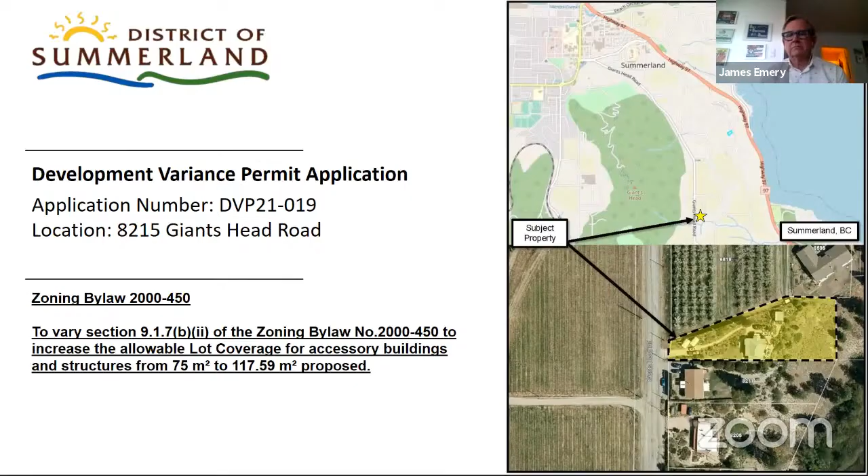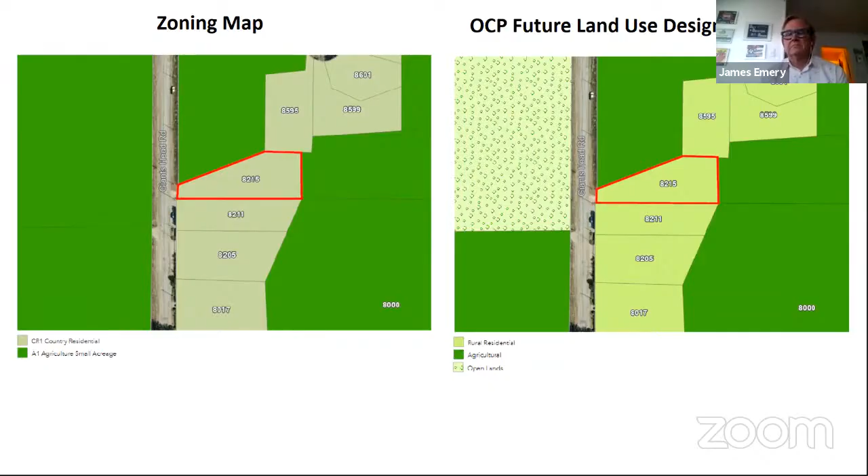In the OCP, the future land use designation of the subject property is rural residential, and it is zoned as CR1 country residential. These land uses are for the most part consistent with neighboring properties. It should be noted that the property is located within the agricultural land reserve.

A letter of correspondence was also received from the Ministry of Agriculture, Food and Fisheries. Their staff noted that if the proposed studio and sauna would be for personal use of the owners, not for agricultural purposes, their interests are unaffected. They also recommended that the applicants maintain a vegetative buffer to mitigate against potential disturbances from the neighboring farm.

As the subject property is not connected to municipal sanitary sewer, a referral was sent to Interior Health. A letter of correspondence was received from Interior Health. Interior Health staff noted that they do not support the issuance of the variance due to the following land constraints: small parcel size, large portion of the property is greater than 30% slope, and the limited area of undisturbed soil available for sewage systems. District staff do acknowledge these concerns.

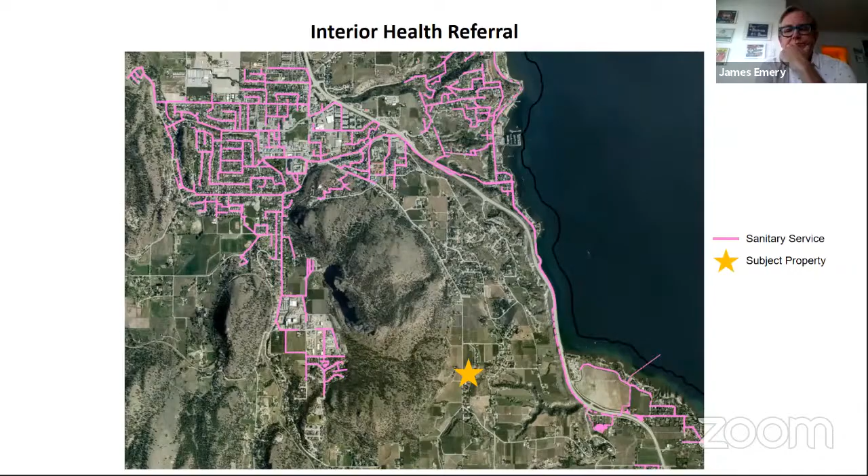However, a septic system approval by a registered on-site wastewater practitioner will be required prior to any building permit that is issued. If no such system can be approved, no development will occur.

Within the CR1 country residential zone, the total allowable lot coverage is calculated at 20% of net lot area. Net lot area means the total area of the lot, excluding any area that exceeds 30% in slope or has been protected as an environmentally sensitive area by a Section 219 covenant or a development permit.

As a result, a large portion of the property is over 30% slope, 836 square meters to be exact, and must be excluded from the lot coverage calculations, which is quite a disadvantage to the property.

The total allowable lot coverage within the CR1 zone for this particular property is 20% of the net lot area, which works out to 260.5 square meters.

The total proposed lot coverage for all buildings and structures on the property is 227 square meters, which meets the bylaw standard for total lot coverage. The proposed development is therefore compliant with the general lot coverage limit.

However, accessory buildings are further restricted to a maximum of 25% of the allowable lot coverage of the site, or 75 square meters, whichever is greater.

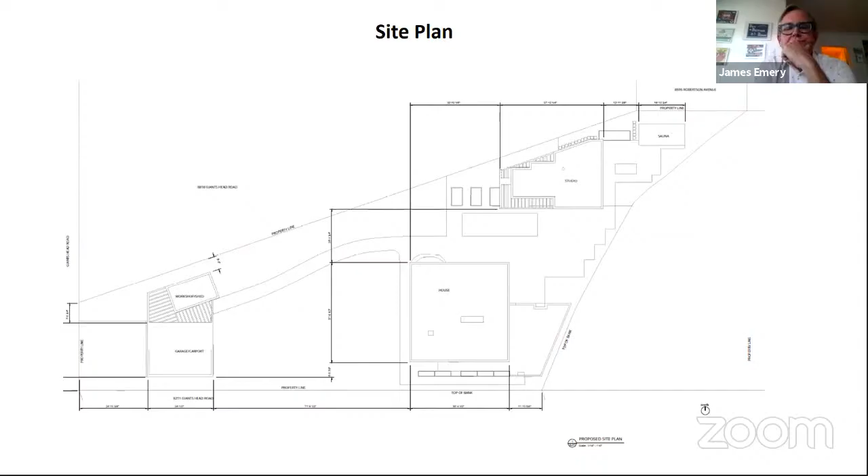In this case, the total proposed coverage for accessory buildings on the site is 117.59 square meters, which exceeds the bylaw allowance of 75 square meters by a total of 42.59 square meters, representing an increase to accessory building lot coverage of an additional 56.7%.

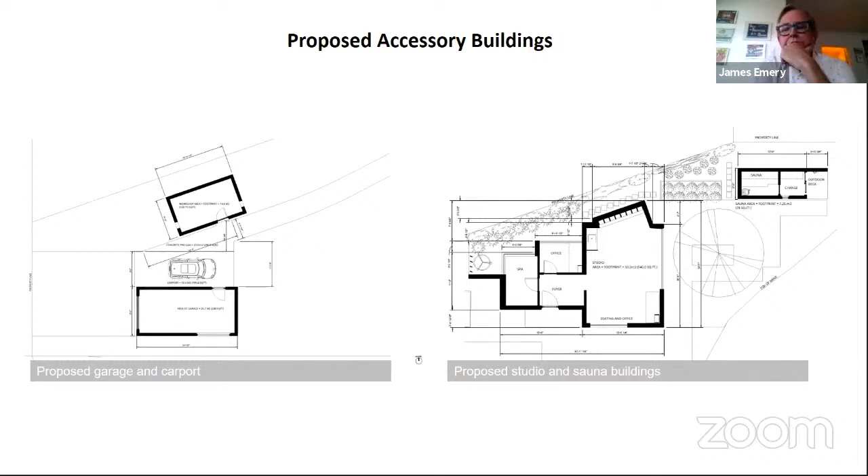Generally, the purpose of restricting lot coverage is to establish building massing and limit impermeable surfaces on a lot to accommodate stormwater infiltration. The proposed lot layout leaves adequate area on site to allow for this infiltration to occur without concern. Though the proposal is not in compliance with the accessory building lot coverage provision, it does comply with all other zoning regulations.

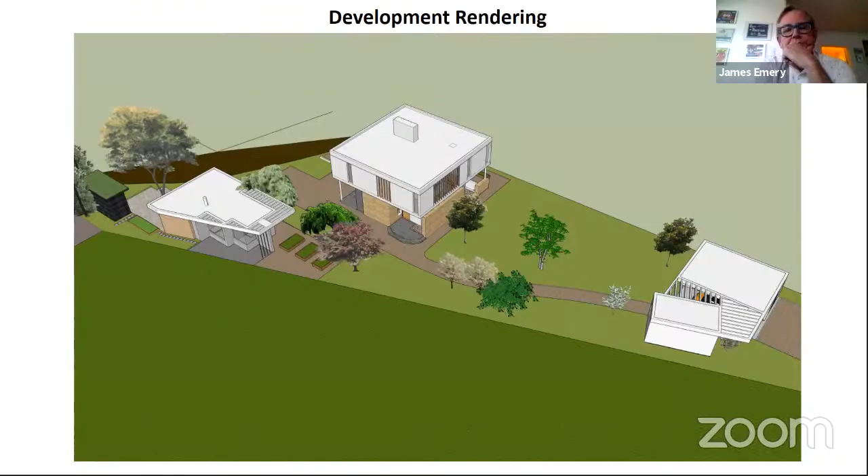Including being under the total allowable lot coverage for all buildings. Further, if the proposed studio and dwelling were attached, then the proposal would fully meet zoning and not require a variance for construction. Based on these factors, and due to the proposal's limited impact on overall neighborhood character and stormwater infiltration, staff are supportive of the variance.

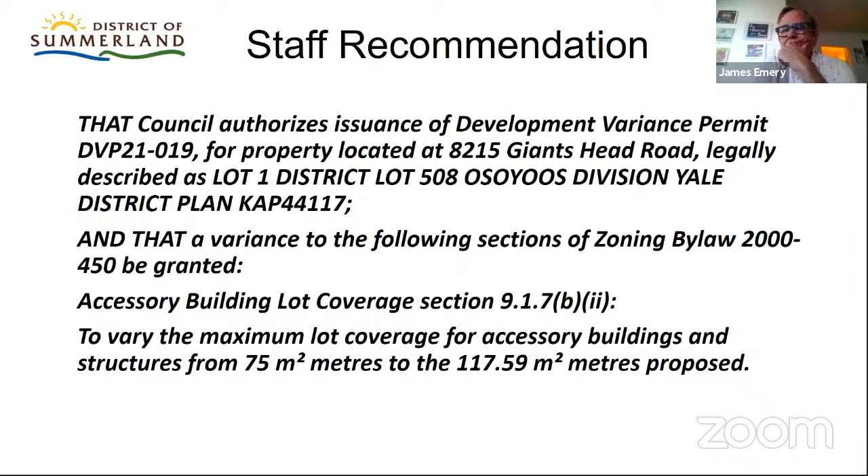I just have one question. Is it proposed that the septic system that's already there will be in the same place? Through the chair, I believe that is the plan. They will be fully redoing their septic system for this development, and I would assume they will choose the same location shown on the site plan. Okay, good, thank you.

Could I have someone bring forward the staff recommendation or something else if you choose? Councillor Holmes: I'll move the staff recommendation that council authorizes issuance of a development variance permit DVP 21-019 for the property located at 8215 Giants Head Road, and that a variance to the following sections of zoning bylaw 2000-450 be granted. Accessory building lot coverage, section 917B2, to vary the maximum lot coverage for accessory buildings and structures from 75 square meters to the 117.59 square meters proposed.

Thank you. Councillor Van Alphen is seconding. Any further discussion? Councillor Barkwell.

I'd just like to note that I like staff's approach on the septic field, not to be bound or hamstrung by very specific arbitrary lot sizes, but to go with what a proper design will work or won't work. There could be lots that have sufficient size that are on solid rock where it wouldn't work, and other smaller lots where it will, such as this, we assume, but there's someone who will do the testing and design the appropriate system, and we can maybe develop some of these spots in Summerland.

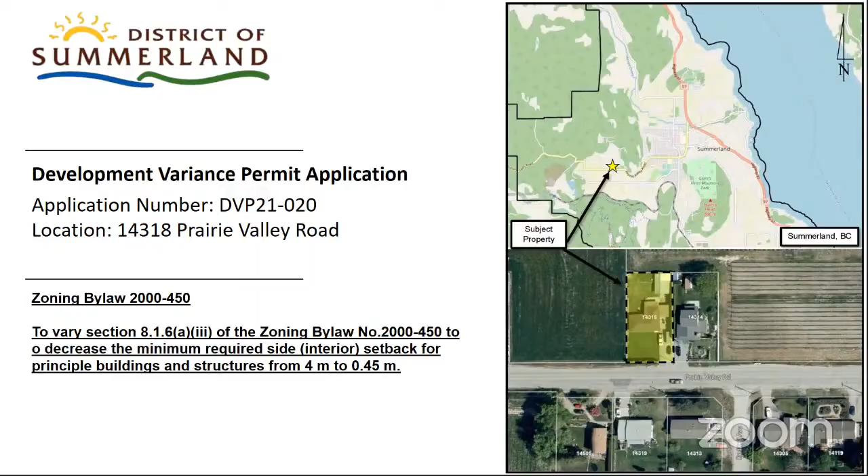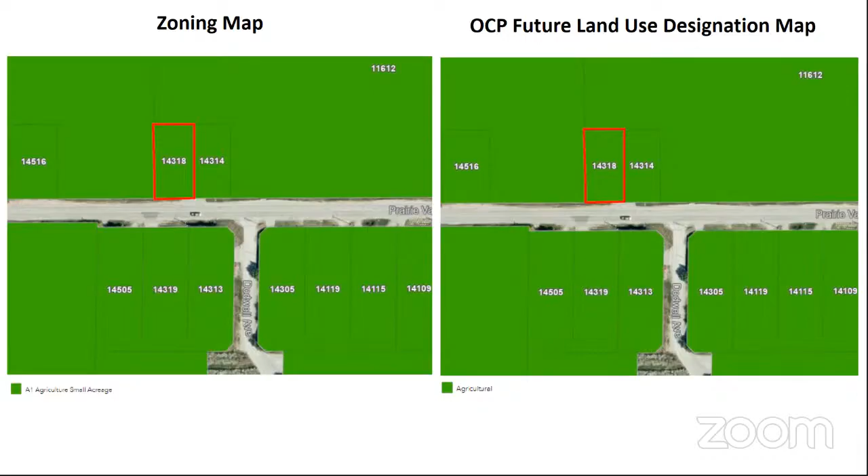In the OCP, the future land use designation of the subject property is agricultural, and it is zoned A1 agricultural small acreage. These land uses are consistent with neighboring properties. It should be noted that the property is located within the agricultural land reserve. No approval is required; however, a referral was submitted to the Agricultural Land Commission and a response was received. They noted that as long as the addition would not expand the residence beyond 500 square meters, the ALC had no objection to the issuance of the variance.

The subject property is a residential lot in Summerland's Prairie Valley. The property owner is proposing to construct a small addition to an existing dwelling. The proposed addition will see an existing covered deck area be enclosed as well as have its roof replaced. The total area of the proposed addition is just 31 square meters.

The existing dwelling does not fully conform to current zoning bylaw yard setback requirements specified for the A1 zone. When an addition is proposed to a non-conforming structure, the non-conformance must first be addressed before the development can proceed and the building permit can be issued.

As such, in order to facilitate the proposed addition, a variance has been requested to section 8.1.6A3 of the zoning bylaw to reduce the required interior side setback from 4 meters to 0.45 meters to bring the dwelling into conformance. While reducing setbacks on residential properties is seldom encouraged because it can disrupt the form and character of a neighborhood, the variance proposed is not anticipated to negatively impact the streetscape. The house has been encroaching into the setback since it was built in 1987, and the proposed small addition will not further encroach into this required setback.

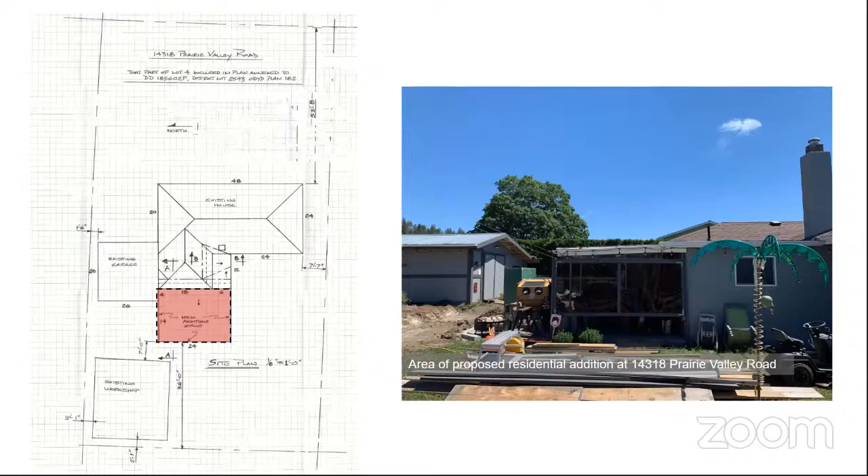When new development occurs to a non-conforming property, it is an opportune time to bring the property into conformance with the zoning bylaw through the approval of a variance. As such, staff recommend approval of the proposed side interior setback variance.

Thank you, Alex. Any questions of staff? I just have one. I didn't see any correspondence related to this item. Can you confirm that, Dallas? There were no written submissions received for this variance. Thank you.

Councillor Van Alphen: Thank you, Madam Mayor. Just a question through the staff, correct me if I'm wrong. So it's agriculturally zoned. Don't we have to confer or engage the ALC on this? Through the chair, we sent a referral to the Agricultural Land Commission, but no, it didn't require any approvals like non-adhering residential or anything like that from them at this time.

So can I ask why then we do so if we're not necessarily required to? Through the chair, often it's just an opportunity to get comment, because we are proposing a variance to our bylaw that could have impacts to their interests. So oftentimes it's more of a better-safe-than-sorry type of thing, and sometimes good recommendations come out of it.

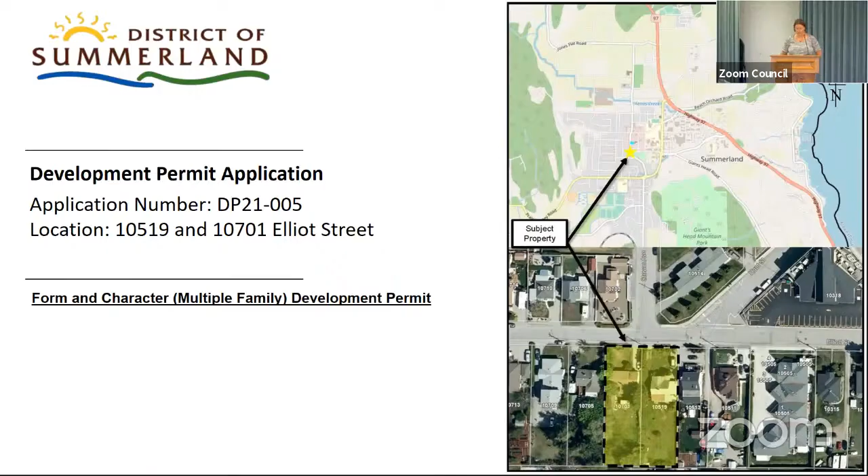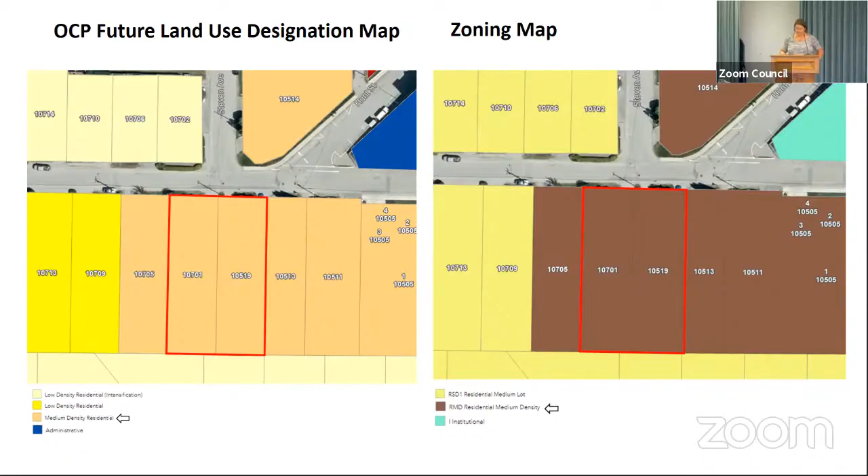The subject properties are located on the periphery of downtown and are designated as medium density residential in the official community plan, zoned residential medium density (RMD). There are 2 legal parcels currently with a combined area of approximately 2,234 square meters, each containing a single detached dwelling. However, Elliot Street is a transitional street based on the zoning designations for the majority of parcels in that area, which are designated as RMD.

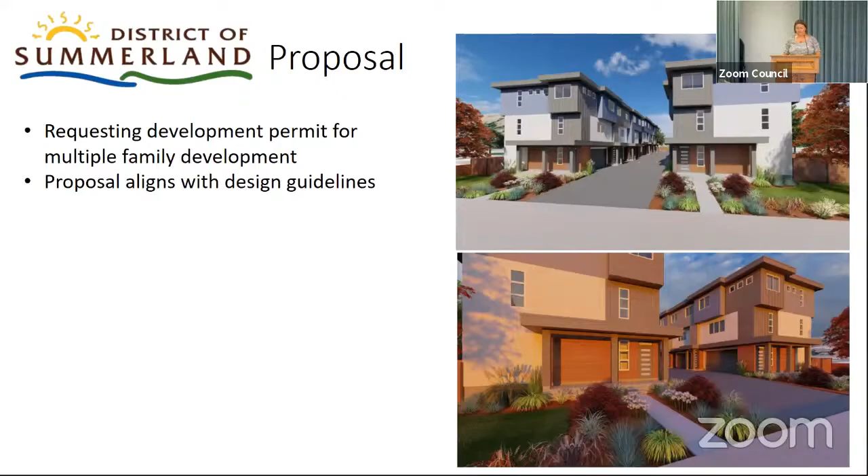This development will be the second townhouse development along this side of Elliot Street. The applicant is proposing to remove the interior lot line between the 2 properties to consolidate into one lot to facilitate construction of a 12-unit townhouse development. The proposed development is comprised of 4 buildings, with 3 townhouse units in each, accessed from a shared central driveway. The development permit evaluates the proposed site design, building design, parking and access, and landscaping for this property.

This item was referred to the Advisory Planning Commission, which reviewed the application on June 25th and provided several comments. In response, the applicant has provided 2 additional visitor parking stalls for a total of 4, addressing APC comments that there were too few visitor stalls available on site. The building plans were also slightly adjusted so that living room windows were offset to provide more privacy to residents, based on APC member comments.

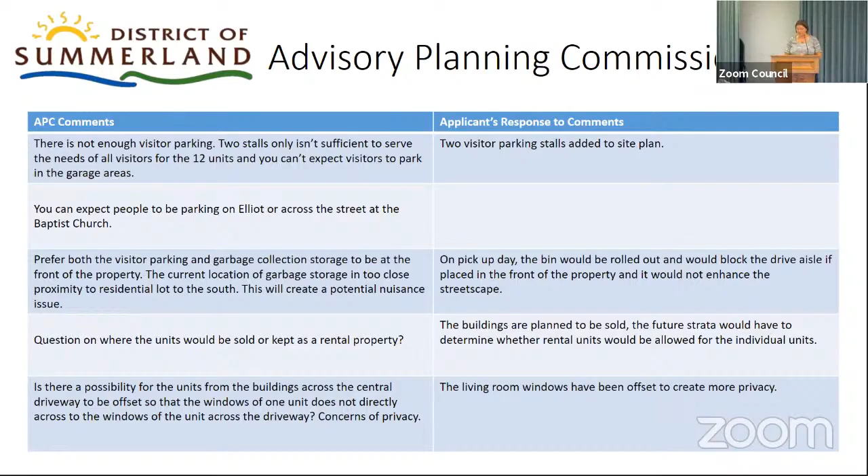There were additional APC comments about the location of garbage and recycling at the rear of the property. However, that location for bin rollout is preferred to one closer to the front of the parcel, which would not enhance the streetscape and would block the drive aisle during pickup day. The APC ultimately recommended that council approve the development permit.

Moving into discussion of some key items about the site design: the proposal is for 4 separate buildings, 2 of which face Elliot Street. The narrow width of those building frontages, along with the sidewalk and driveway connections, mimics the existing street rhythm along Elliott, where building widths are generally between 9 and 15 meters. The buildings proposed along that frontage are within that range, at 10.3 meters wide.

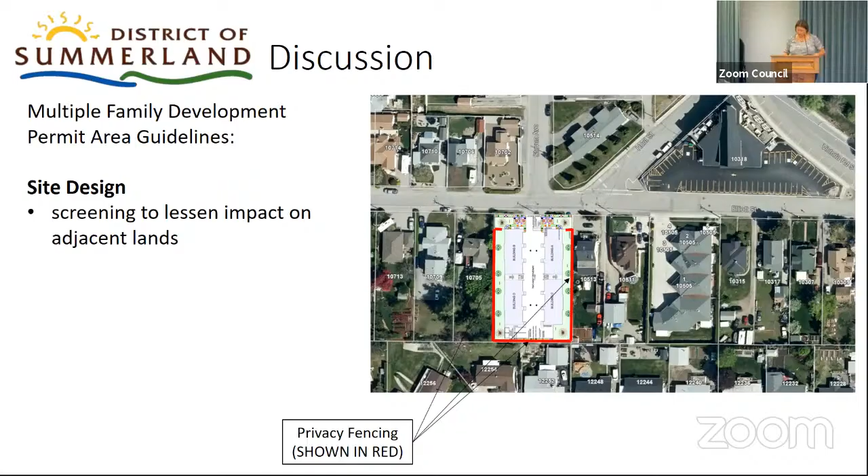There's also provision for outdoor amenity areas directly accessed from each unit, shown in green as the grassed areas for each of the buildings to access from the side.

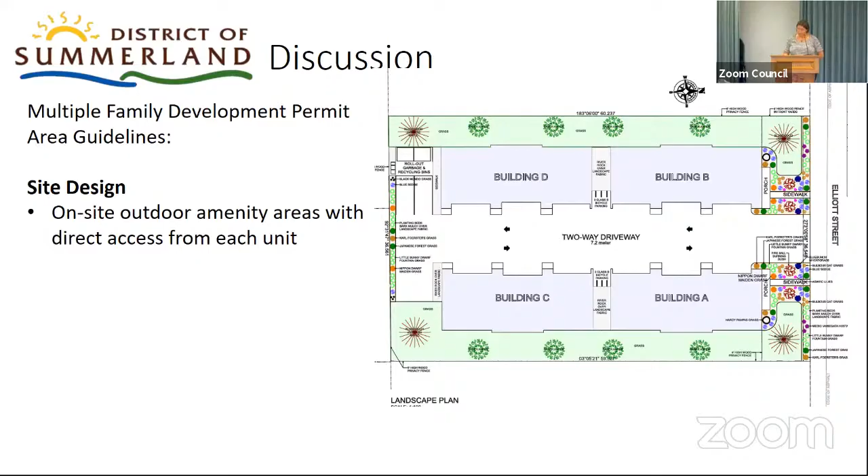This building's design is a fairly contemporary modern design. It has been architecturally designed with colors, textures, and articulation of the building facades to create high visual interest throughout the building development. It is a transitionary space between lower density neighborhoods and downtown Summerland. These types of detailing elements are critical to create inviting spaces that enhance the pedestrian experience, while also providing more diverse housing and density close to the central core of Summerland.

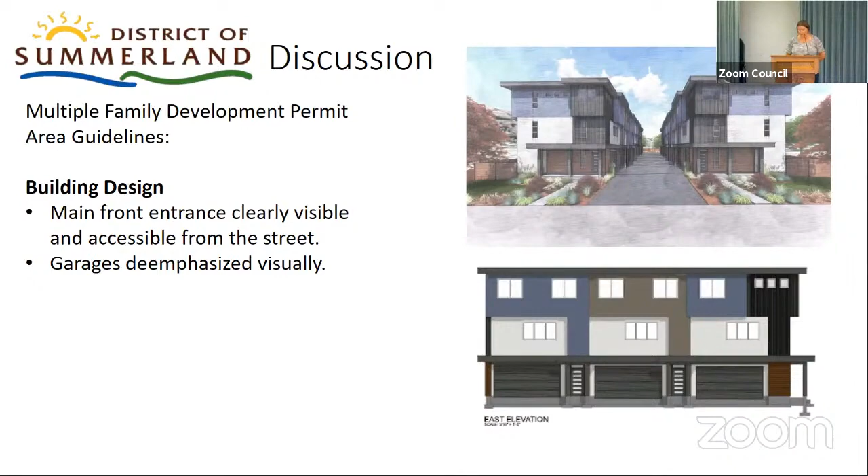The 2 units that front Elliot Street create visual interest and reflect surrounding residential uses through their separate accesses, covered patios, and windows facing the street. There is a clear connection to the entrance from the street, and the garages are provided under the building facing the interior driveway and not on the street. As such, the garages are not prominent along the street and are de-emphasized visually.

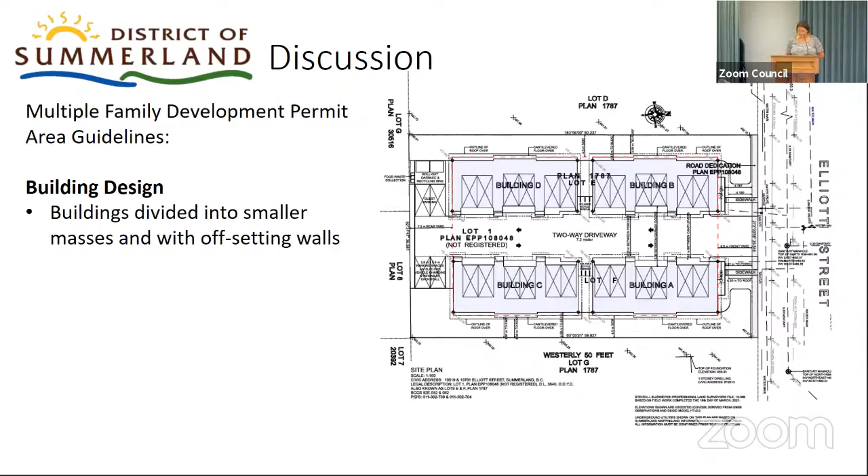Another key feature of the design is that the 12 units are divided into 4 separate buildings, which limits the long expanses of wall and building mass for each building, creating a bit of a breakup between the buildings. There's also variation along the building walls to provide more variation in color, but also slight projections throughout the building to create jogs of visual interest as your eye works down the building.

There is, however, one design guideline where developments comprised of a number of buildings should avoid duplicate mirror image designs. As you can see from the photo shown here, the development does include a mirror image design, but it's not seen as being overly repetitious, given the number of buildings provided. It's also seen as providing a cohesive design between the buildings.

I feel that the separate buildings are more favorable to an overall design than one large building with a similar design throughout. So for that reason, I find that it meets the intent of the guideline, which is essentially to avoid a monotonous pattern throughout the streetscape.

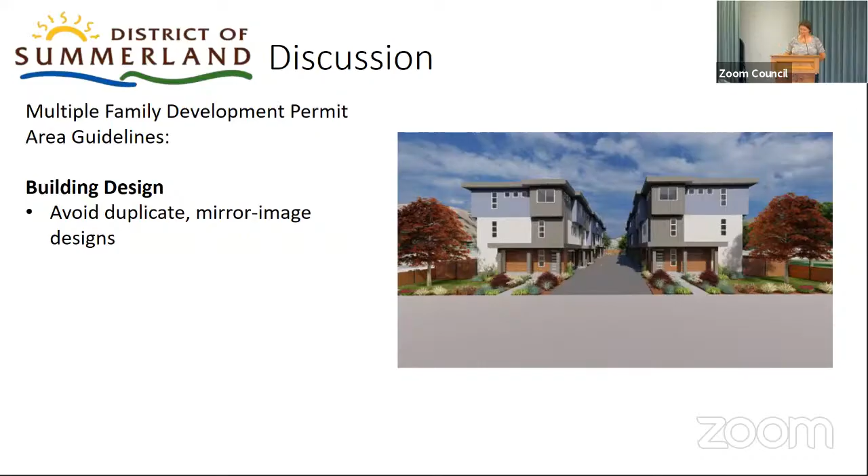In terms of access and parking, all the parking is accessed from the shared central driveway on site, and each of the townhouses is equipped with a 2-car garage with space for bicycle parking. There's an additional 2 visitor parking spaces at the rear of the property, in addition to 2 additional stalls with EV charging capability, and there are also 6 outdoor bicycle parking spaces between the buildings. The driveway provides plenty of space for 2-way vehicle movement without disrupting the streetscape.

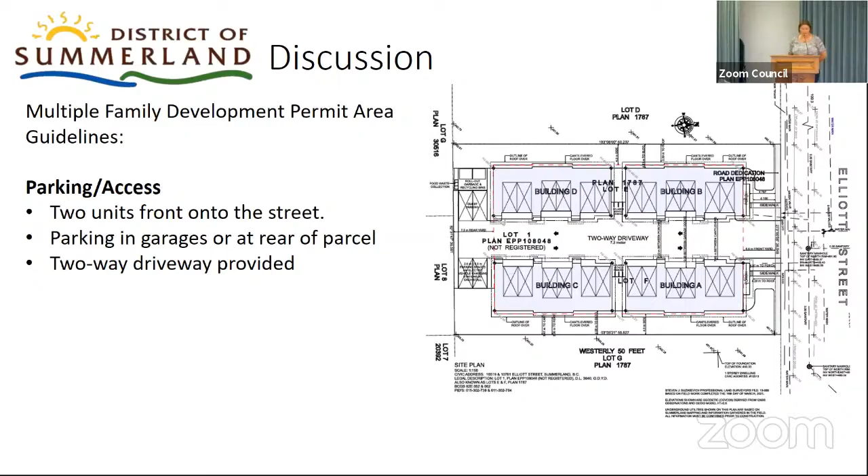With respect to pedestrian connections, a new sidewalk will be required to be installed, as well as a crosswalk at the corner of 10519 Elliott to the existing sidewalk at Hunt Street. These offsite improvements enhance connectivity and pedestrian safety in the area.

Landscaping is provided throughout the site, largely focused at the front of the development where it's most visible. A variety of grasses, shrubs, and trees are to be planted along Elliot Street, which softens the overall appearance of the buildings and creates an inviting atmosphere to the street. Landscaping for the remainder of the development includes trees planted around the periphery, and there is a wooden fence that also provides shade and privacy for neighboring properties. The areas where landscaping is unlikely to survive in between the buildings are decorated with river rocks.

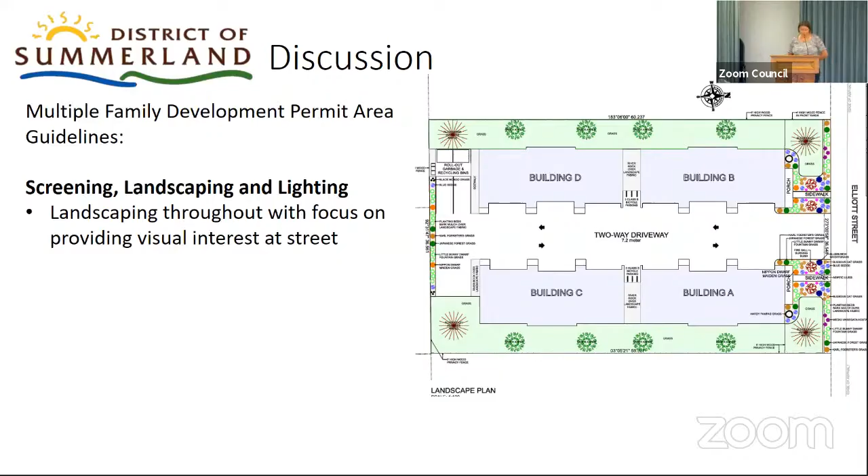Overall, the proposed development satisfies the OCP design guidelines that strive to create visually interesting developments that enhance the character of a neighborhood. As such, staff is recommending approval of the development permit subject to 2 conditions. The first being that landscape security in the amount of $46,200 be provided, and the second being that the lots be consolidated to create 1 legal parcel to facilitate the development. Thank you.

Thank you, Joanne. I think that's your first presentation to council, isn't it? It is. Thank you. Yes, well done. Okay, questions?

Councillor Van Alphen, maybe. Just, I was looking through here. Has this been circulated through to our fire chief? Any concerns? Yes, it has gone through internal referral for comments, and I do not believe that there were any concerns from the fire department that were noted at that time, except that, as per the fire limit area bylaw, any building needs to be sprinklered because it's over 2 stories in height.

Along with this sprinkler system, it will also require a central station monitored fire alarm system throughout the building, and there will be water modeling required as part of that process for the sprinkler connection. It requires a 45-meter path of travel from buildings with a sprinkler connection to the fire hydrant. Thank you.

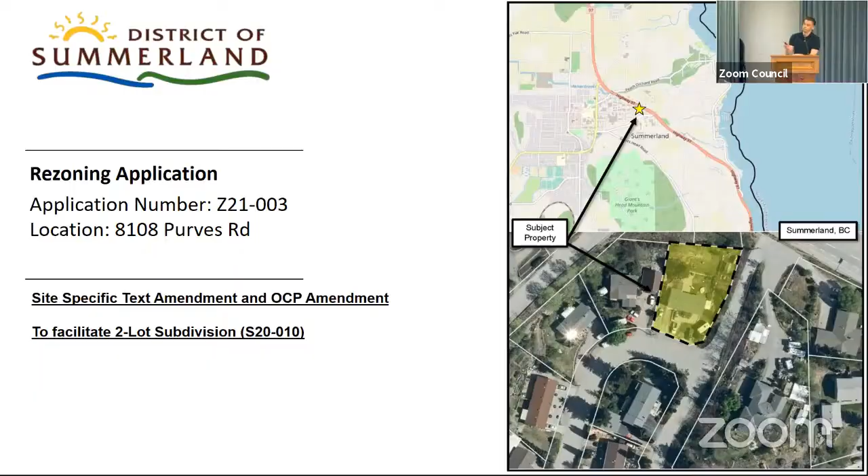This application was presented to the Advisory Planning Commission on February 26, 2021. At this meeting, members of the commission were generally supportive of infill development on the site, but thought that the proponent should redesign the concept to work with the topography. Safety concerns were also raised about the parking and proximity to the corner, as the property is a corner lot. Lastly, members encouraged the proponent to consider a fourplex design as opposed to duplexes.

Although it is not required for applicants to come back to the APC after receiving initial comment, the proponent in this case voluntarily requested to go back before the commission in an effort to gain support before proceeding to council. So the Advisory Planning Commission again considered the updated application at their meeting on March 26th, 2021. Comments from the APC included that the revised layout was an improvement and that the changes to the parking and overall design are more functional. Some members did reiterate previous concerns that the lot would be better developed with a fourplex, particularly as discussions around the downtown plan are moving forward. Ultimately, however, the APC did recommend support of council on this application.

The developer held a public information meeting for this proposal on June 7th, 2021. The meeting was held over Zoom and included a presentation from the developer's agent and allowed for participants to ask questions afterwards. Notification for this meeting was provided with a local newsletter ad, a development sign was posted at the site, and letters were delivered to all properties within a 60-meter radius of the proposed development lot. 4 attendees joined the meeting from the neighborhood.

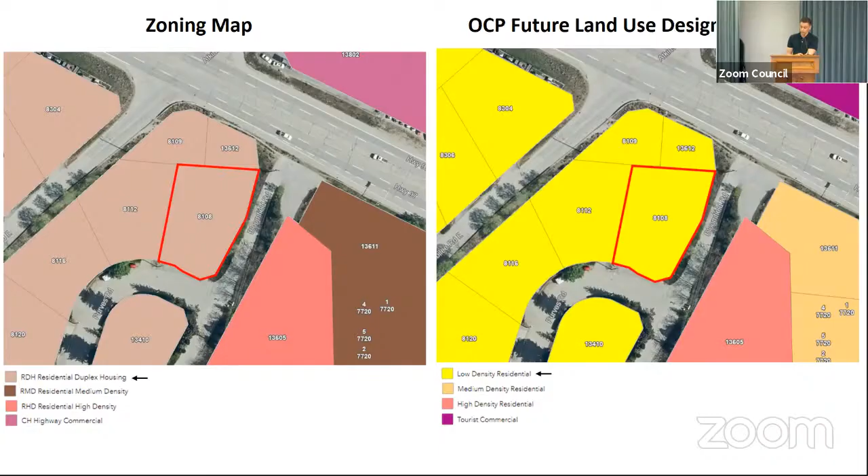The subject property at 8108 Purves Road is disadvantaged in several ways. First, despite the zoning designation to allow for duplex housing, the lot is a challenging size and shape. It is not large enough to meet the minimum subdivision regulations that would allow for 2 duplex buildings. However, siting 1 duplex on this lot would be an inefficient use of space given the area. Secondly, the property abuts Bloomfield Road in addition to Purves, which would provide adequate frontage for 2 side-by-side duplex units if fronting that road. However, the grade change between Bloomfield and the lot is too significant to facilitate a development like this. These traits had led the developer to pursue an alternative design, a front-to-back duplex.

The concept calls for an individual front-back duplex building to be sited on each of the newly created duplex zoned lots. 2 of the 4 units would front onto Purves Road, while the other 2 units would be accessed from a rear yard via a path from the rear parking area. 2 separated parking areas contain all 8 required parking stalls for the proposed development. Proposed Lot A is proposed to have an access easement over proposed Lot B to have access to 2 of the 4 proposed parking stalls that are accessed off Bloomfield Road.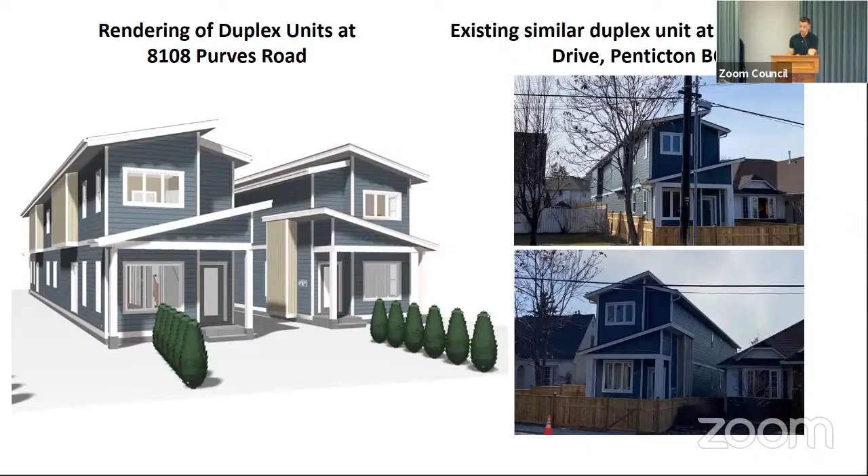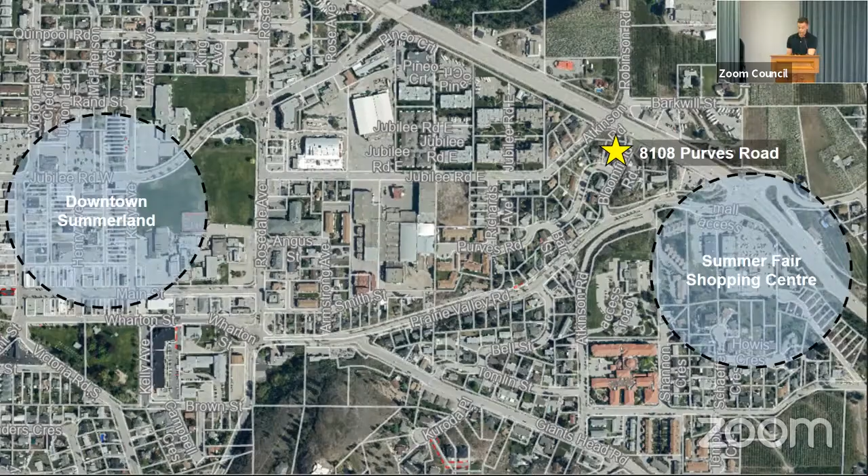Policies and objectives within the official community plan generally direct growth to areas with existing services available that are close to amenities. This is an efficient and cost-effective way to approach growth and development for a municipality while helping to achieve density targets that support transit, cycling, and walking as viable alternatives to the private automobile. The official community plan also includes objectives and policies directed at diversifying housing options and providing more affordable options. These goals are in line with the 2017 Affordable Summerland report, which specifies the importance and current lack of housing diversity within the district of Summerland.

Policies and objectives within the OCP. That's a double print, my bad.

The proposed subdivision and duplex development at 8108 Purves Road would help achieve these goals outlined in the official community plan for densification in serviced neighborhoods and diversity of housing types by adding 4 duplex housing units on a lot that currently has 1 single-family home. The property is located close to existing commercial amenities at the intersection of Prairie Valley Road and Highway 97 and is within walking distance of downtown, helping to promote less automobile dependence.

In addition of housing variety through small form duplex units and 4 additional residential units in the place of the current 1 single-family home, and in an area in close proximity to amenities and services, is seen as a way of encouraging gentle densification to help the district meet its housing supply needs. In addition, the applicant made changes to the proposed parking area configuration and unit access on the site to accommodate design concerns from the APC. For the above reasons, staff recommend that the rezoning application be provided first and second reading and proceed to a public hearing. Thank you.

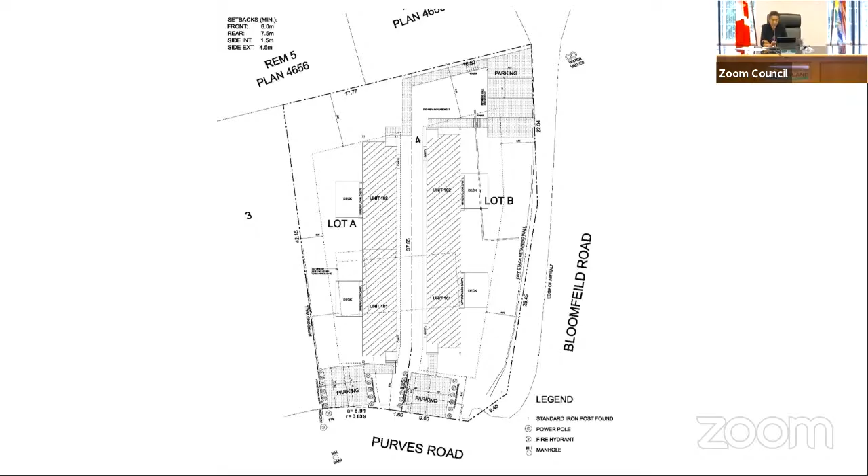And is there parking allowed along Bloomfield Road or Purves Road? I'm just thinking for visitor parking. So, here, well, there's Bloomfield - you can see my car's parked down, the white one down there, for example. But I would say people probably will. It's not the widest road, but there are quite a few roads that people will use as additional parking areas that are probably narrower than this.

Okay, and it doesn't look like there's a lot of, well, from what we can see, a lot of driveways where it would limit the access. Okay, thank you, that's all I had.

Anyone else? Okay, could someone bring forward a motion, please? Let's give Councillor Van Elfen a break. Thank you, Councillor Carlson. Oh my goodness, I'm sorry, it was stuck. All right, I've got two different ones in two sections, yes?

We're voting twice? Yes, that's correct, I think - one is for zoning, one's for the OCP amendment. I'll move the right, but we can do them both at the same time, though, right? Yes. Okay, was that what your question was? Yeah, just read them both at the same time.

I'll move that the official community plan amendment bylaw 2021-008 at 8108 Purves Road be introduced and read a first and second time, and that a public hearing be held on September 27th, 2021 to receive public feedback on OCP amendment bylaw 2021-008 at 8108 Purves Road. And number 2, that the zoning bylaw amendment at 8108 Purves Road, bylaw 2021-009, be introduced and read a first and second time, and that a public hearing be held on the 27th of September to receive public feedback on zoning bylaw amendment number 2021-009 at 8108 Purves Road.

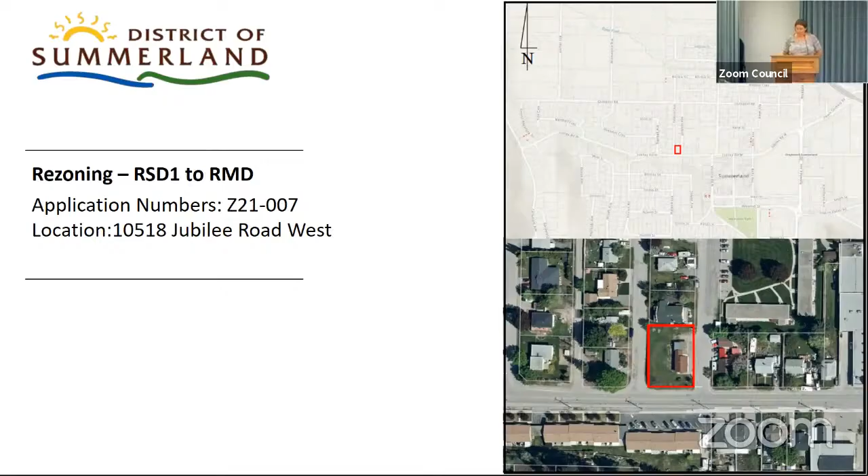Thank you, Madam Mayor. So an application has been received for a zoning amendment for 10518 Jubilee Road West to change the zoning designation of the subject property from residential medium lot, RSD1, to residential medium density, RMD. The RMD zone would allow for multiple units on the property in the form of townhouses, apartments, duplex, or cluster housing.

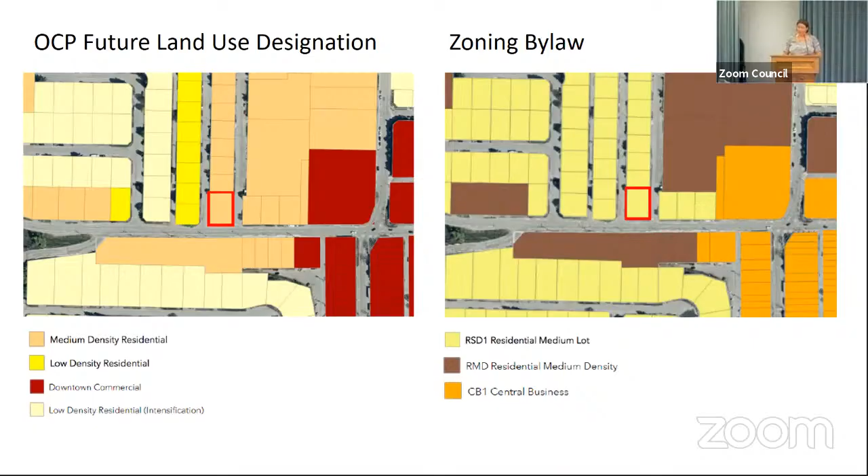The subject property is located on the periphery of downtown Summerland and is designated as medium-density residential in the official community plan. The current zoning designation, as I said, is RSD1, and changing the zoning designation to RMD is consistent with the OCP designation.

The property is approximately 2,266 square meters and currently contains a single detached dwelling. The property fronts three roads: Jubilee Road West, Spencer Avenue, and Dickinson Avenue.

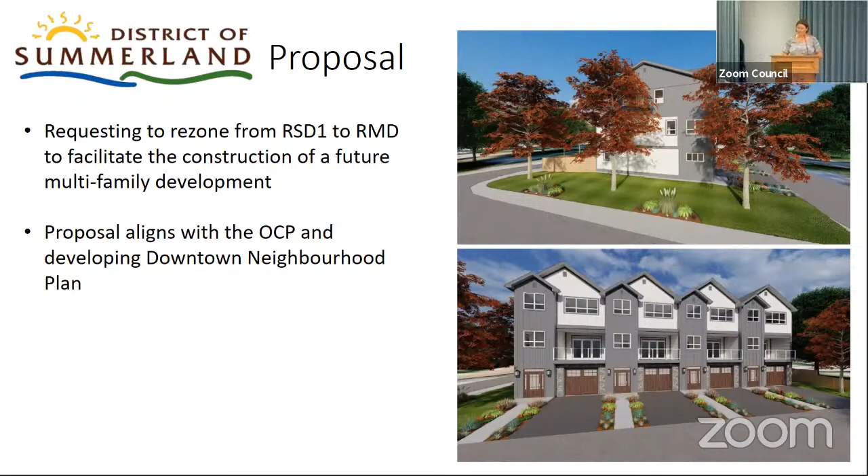The applicant is requesting to rezone the parcel from RSD1 to RMD to facilitate a multiple family development. This proposal aligns with the OCP as well as the downtown neighborhood plan. Although there are renderings shown here depicting a 4-unit townhouse development, these are conceptual plans only at this stage, as the site and building design will be reviewed as part of the development permit if the zoning amendment moves forward.

The Advisory Planning Commission reviewed this proposal on May 28th and recommended that the rezoning be supported by council. Although there were some concerns over height in general, the general consensus was that this proposal aligns with future growth anticipated in the area.

There was also a developer-directed public information meeting that was held electronically on July 29th. However, no members of the public attended, and there have been no comments received from the public to date on this application.

This parcel is located within the urban growth area for Summerland. The urban growth area is meant to support broad community goals by directing growth to areas with servicing while avoiding loss of farmland and environmentally sensitive areas.

The urban growth area is where intensification of land uses are meant to occur over time and where infill is encouraged. This rezoning would enable intensification of the residential use by allowing more residential units to be built on the site. It also allows for more compact development to occur very close to the downtown core and in an area with servicing and pedestrian connectivity available.

Allowing additional units near the downtown is seen as supporting the vibrancy of the downtown, as more residents are within walking distance to shops, parks, and amenities.

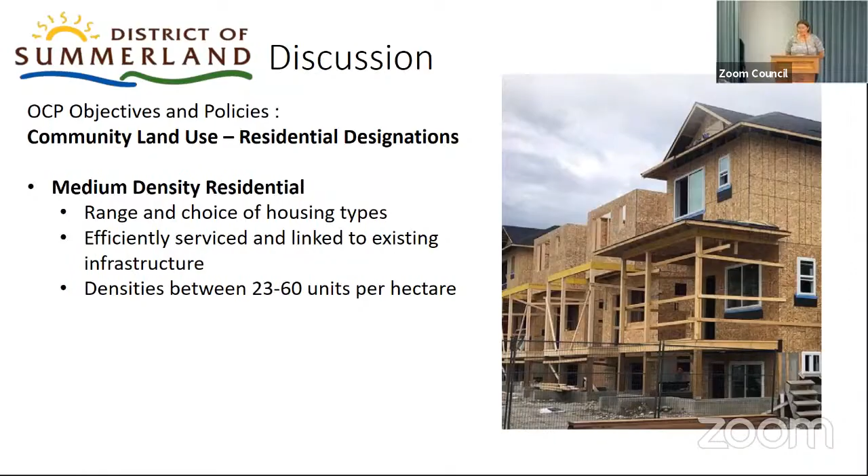As noted earlier, the applicant is intending to build a 4-unit townhouse development. This parcel is also included within the scope of the downtown plan, and one of the key focuses of this plan is to consider additional density close to the downtown.

If this rezoning occurs, the multiple family development permit area will apply, as it automatically applies to all multiple family uses, and the form, siting, and character of the proposed development will be evaluated in relation to the design guidelines. This is in an area of transition where both sides of Spencer Avenue are currently single detached dwellings. As such, site design elements such as screening will be important to lessen impacts to adjacent lands moving forward. However, the plans at this stage are conceptual, and the application for consideration today is for the zoning amendment, not for the form and character of the specific plans.

This proposal is seen to directly align with the OCP, and as such, it is staff's recommendation to provide first and second reading of the zoning amendment bylaw and schedule a public hearing for September 27th. Thank you, Madam Mayor.